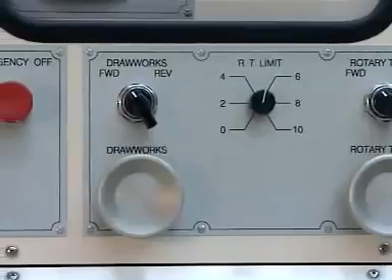As most of these problems can be simulated on ADC Well Control Training Simulator, this movie is an effort to explain the possible complications, to recognize the indications, and take the appropriate actions in a timely and efficient manner. Welcome to the ADC Simulator, where we make the effort to simulate well control situations which occur on the rig as realistically as possible. In the following few minutes, you will see an enactment of a well control operation and the complications that might arise during this operation.

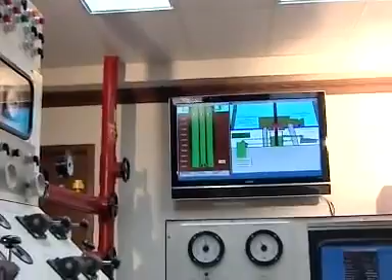Hello, boss. Hello, driller. How are you? Fine, thank you. Hope you had a good rest. Yeah, I'm excellent, in good shape.

Very good. So today we'll be drilling. Okay. And while drilling, these are the parameters you have to keep. Weight on bit will be 25 to 30,000 pounds. Okay. RPM 120. Okay. SPM will be 70. So before you start, driller, make sure all your lineup is okay. Okay. On the rig floor and also on the choke manifold. Send your assistant driller and make sure the lineup is okay. Right.

Check your alarms, and we are entering the pay zone now. Right. So you have to be very careful. Okay. Make sure you set all your alarms. Okay. And if there is any drilling break, please make a flow check. Okay. And if it's flowing, then we will use the hard shut-in method. Sure, sure. Okay.

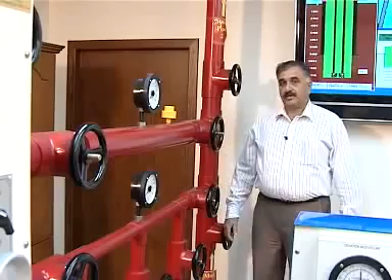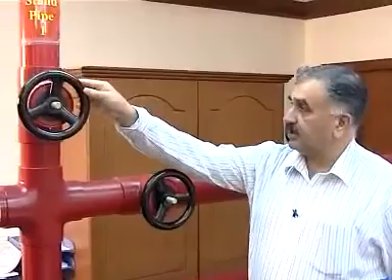I will check the standpipe manifold for correct lineup. Both mud pumps, mud pump number 2 and mud pump number 1, should be lined up. Standpipe number 1, the valve is in open position if the spindle is extended out, and if the valve is in closed position, spindle will be inside. The valve going to standpipe number 2 is in closed position.

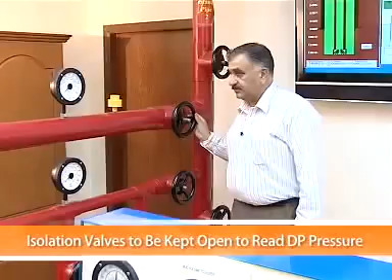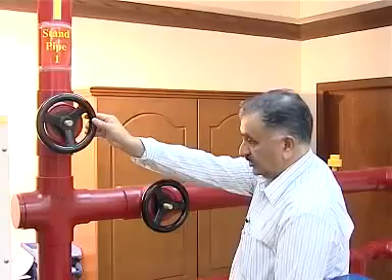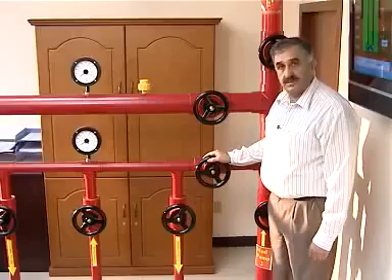This isolation valve in the middle is in open position. Both of these valves are leading to standpipe number 1, which is also in open position. The line coming out from mud pump number 1 is in open position. So both of the mud pumps, mud pump number 2 and mud pump number 1, are lined up to standpipe number 1. All valves on auxiliary lines should be in closed position. Closed, closed, closed, and closed.

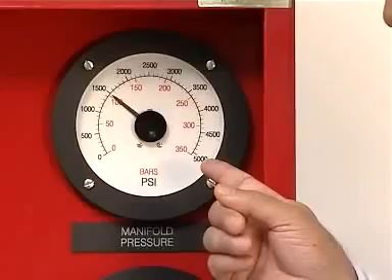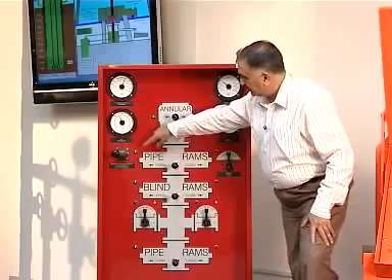Now I am checking BOP remote panel. Accumulator pressure 3000 psi, air pressure 120 psi, manifold pressure 1500 psi, annular pressure 1500 psi. Green light indicates that annular is in open position. Green light, upper pipe rams in open position. Green light, blind rams in open position. Red light, kill line in closed position.

Red light, choke line in closed position. Green light, lower pipe rams, which are master pipe rams, are in open position. So all BOPs are in open position. Both kill line and choke line are in closed position.

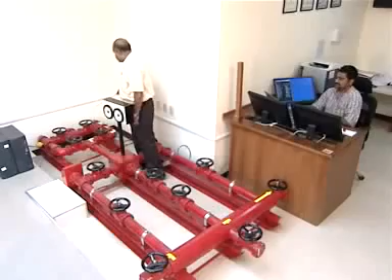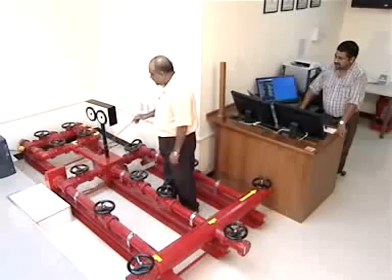As we will be using the hard shut-in method, this is the way we are going to line up the choke manifold. This is the line coming from the BOP and into the block of the choke manifold. From the block of the choke manifold, on this side we have the remote choke which will be in the closed position, and on this side we have the manual choke which is also in the closed position. The path the mud will take will be from the block through this open upstream valve, remote choke closed, valve downstream open, and out into the mud gas separator.

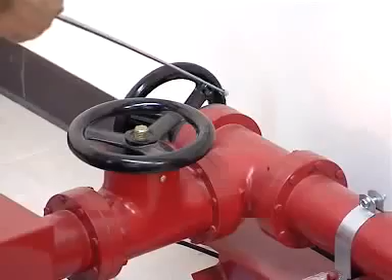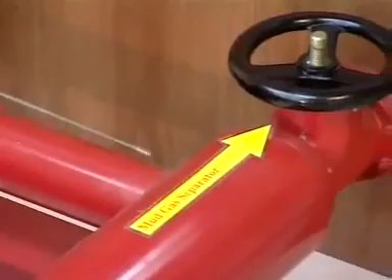From the block there is also the bypass line with two valves on this line, both of which are in closed position, which is connected to the buffer line, through which it goes to the flare line. This valve upstream of the manual choke is in closed position, the manual choke closed position, the valve downstream of the manual choke also in closed position, and this line also joins the buffer line. These are the gauges mounted on the choke manifold, one for drill pipe pressure and one for casing pressure.

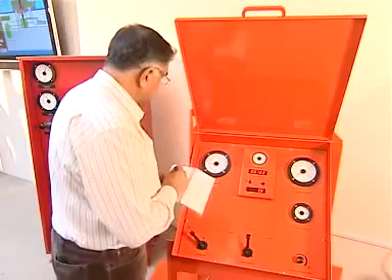To start the engines, press this button. To start the second engine, press this button. Put the mud pump 1 on, and before I go ahead to drill, I will take the slow circulation rate, bring the mud pump to 30 strokes, and I will read the pressure from remote choke panel. Slow circulation rate at 30 SPM, 650 psi.

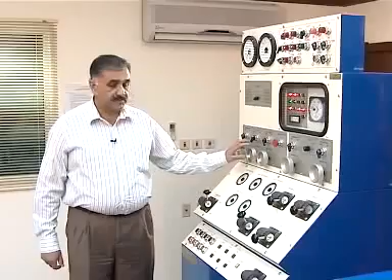I will bring the pump to 40 strokes. I will read the pressure from remote choke panel. Slow circulation rate at 40 SPM, 1150 psi. After taking the slow circulation rate, I will bring the pump speed to 70 SPM, and then I will set the alarms.

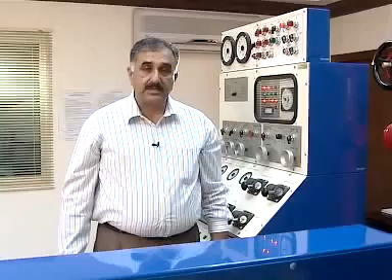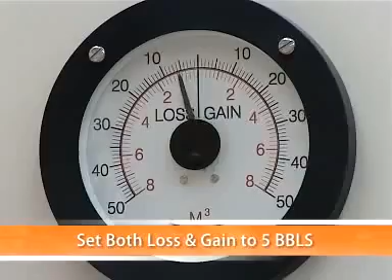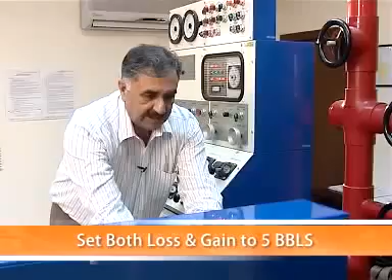Now I will set pit loss and gain alarm. I will switch on mud volume totalizers. For the active system, put the power on. Press this knob to the left and turn low adjust to the right until I see a red light. Similarly, press high set to the right and turn high adjust to the left until I see a red light.

Now I will set my flow line sensor for small increase or decrease in flow. So press this one to the left side and then rotate the low adjust until I hear an alarm. Then press to the right side and rotate high adjust until I hear an alarm. So now you leave it on, make sure the alarm is in on position.

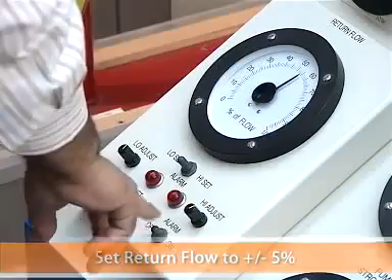I will lower the bit to bottom, and once the kelly drive bushings are sitting inside rotary table, then I will start the rotary. Okay, I'll continue to lower down until I tag bottom.

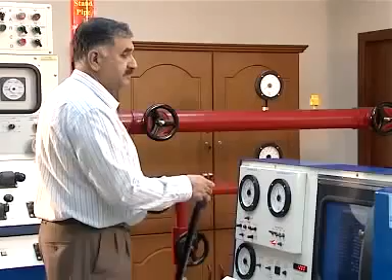I got a drilling break, stop the rotary, disengage the rotary clutch, and now I am picking up.

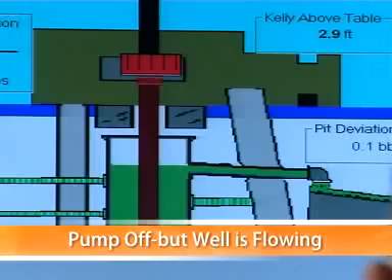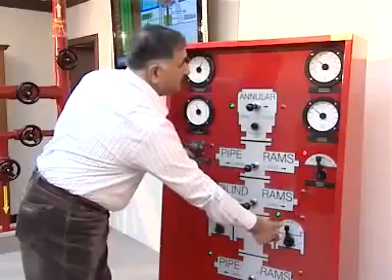Now I will shut the well in. And open the choke. Well is shut in. Tool pusher, come on rig floor. I have a kick.

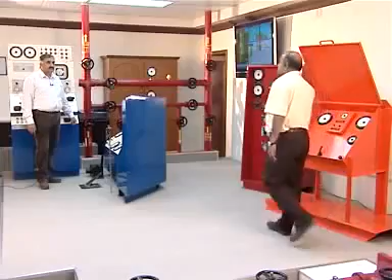Yes, driller, what happened? Well, I made a flow check on drilling break, and the well was flowing. So I shut it in with the upper pipe rams, and I've got shut-in drill pipe pressure 810 and shut-in casing pressure 900. And what is the gain? 4 barrels. Okay, what is the MAASP?

1600 psi. That's a very small kick. I think we can manage to kill it very easily. I will go round, make a quick check and come back. In the meantime, you keep monitoring the pressures to check for migration. Make sure that the pressure does not exceed the MAASP. Anyway, if it is going more than 200 psi than what it is now, please call me. Okay.

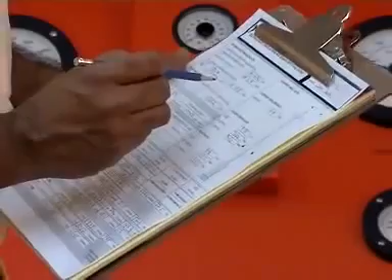Okay, the kill sheet is now ready. The MAASP is going to be 1690 psi. We will be pumping at 30 SPM, and the strokes to displace the string volume is 2326. The open hole volume is 1719 strokes. The total annulus volume or the bottoms up is 6513 strokes, and the total volume to kill the well is 8838 strokes.

The kill mud we will use is 13.2 ppg, and we have the pressure schedule here, the pressure drop for every 100 strokes of kill mud pumped, and these are the graphs for this schedule.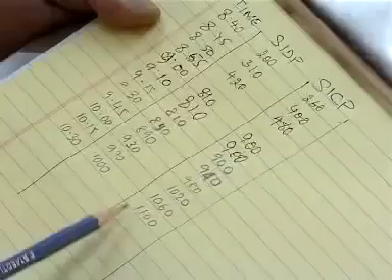The stabilized pressure at 9 o'clock was 810 psi on the drill pipe and 900 psi on the casing. It stayed like that till 9:15, and after that we are seeing some gas migration, and the pressure at this time at 10:30 is 1000 psi on the drill pipe and 1100 on the casing. That means there has been an increase of about 200 psi.

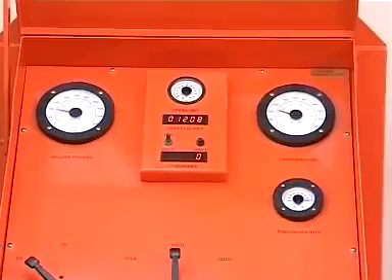As we have had an increase of 200 psi due to gas migration, the first thing that we will do now is to bleed off this excess 200 psi to restore the bottom hole pressure to its original value. To reduce the drill pipe pressure by 200, we have to be looking at the casing pressure gauge, because there is a time delay of 1 second for every 1000 feet of the well depth.

So now I am going to reduce the pressure on the casing side by about 100 psi, and then we will see a corresponding drop on the drill pipe gauge after a few seconds. The drill pipe pressure is now 850 psi. That is about 40 psi more than when we initially shut in the well. So we can now start killing the well.

Driller, the kill mud is ready, so have the derrick man line up the kill mud. We will be killing this well with 30 SPM using the wait and weight method. So I want you to increase the pump in stages, 5, 10, 15, all the way to 30 as I give you the signal.

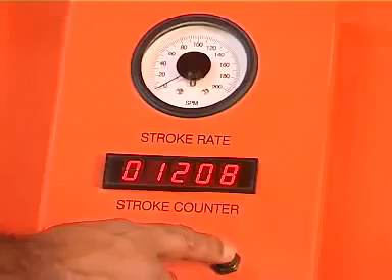First of all, we will reset the stroke counter. Okay, driller, give me 5 strokes please. We will bring up the pump to the kill speed in stages, holding the casing pressure constant by opening the choke as necessary.

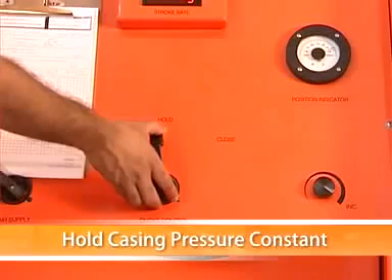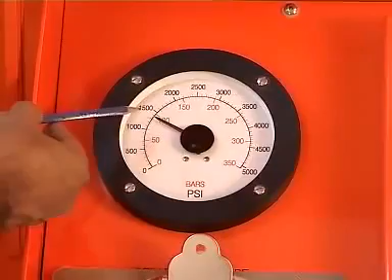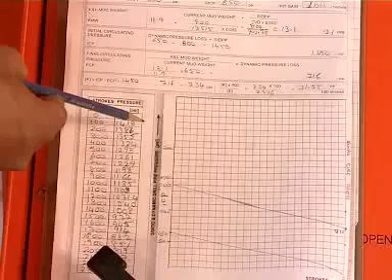Now that we have the pump rate up to kill rate speed, we will now follow the schedule as we have calculated in the kill sheet. We have now pumped 213 strokes. We have a pressure of about 1400 psi, and we need to keep, as per the schedule, 1380 psi, which means we are 20 psi overbalance, which means everything is going well.

We have now pumped 904 strokes. The pressure is about 1200 psi. As per our graph, we should have 1160 psi. So we have now 40 psi overbalance, which means still everything is okay.

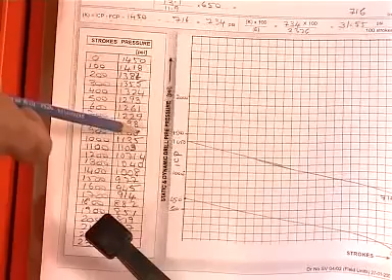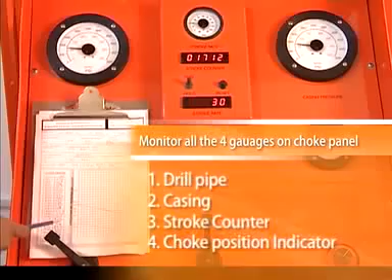We have pumped now about 1700 strokes. On the drill pipe side, we have about 950 psi. As per our schedule, we should be having 915. So we are still overbalanced by about 35 psi, which means everything is still okay.

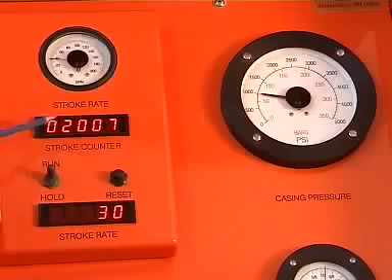The casing pressure has been rising steadily as the gas expands as it comes up the hole. Since we have already pumped 2000 strokes, we do not worry about the MAASP anymore, because the influx is already inside the casing.

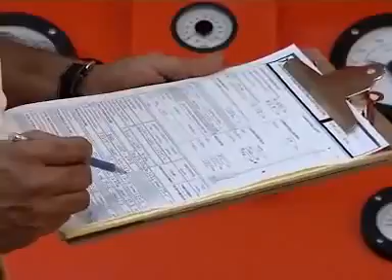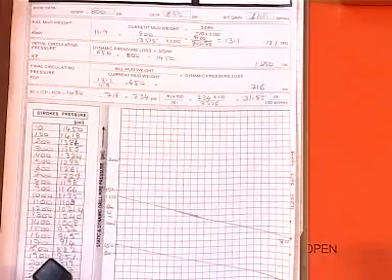We have now pumped 2367 strokes, which means we have displaced the drill string with the kill mud. We are now at the final circulating pressure, which according to our calculation should be 716, and the gauge is showing 750, which means we are 35 psi overbalance and everything is okay.

We have now shut down the pump after pumping the string volume to check for pressures. The pressure on the drill pipe side is 0. That means the well is dead from the string side.

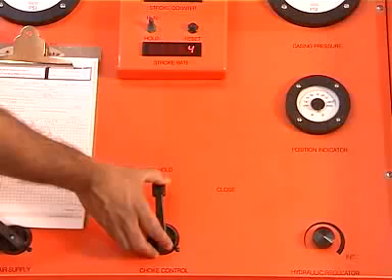Okay, driller, give me 5 strokes please. We will bring up the pump to the kill speed in stages, holding the casing pressure constant by opening the choke as necessary.

Oh, the pressure seems to be going up on the casing side. The casing pressure has climbed up from 1100 to about 1400. That's 300 psi more than normal. The drill pipe pressure also has climbed up by about 300 psi. Okay, driller, put the pump off. Totally off.

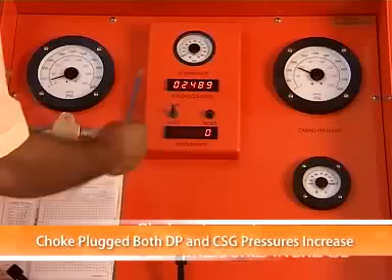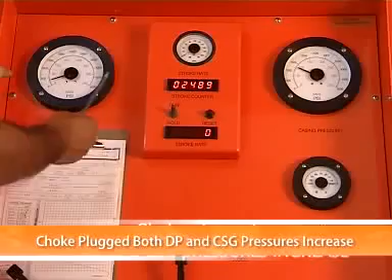We noticed that first the casing pressure started to go up, and after some time the drill pipe pressure also started to go up. Looks like we are having a plugged choke. So I asked the driller to shut down the pump immediately, and I closed the choke as well.

Now the drill pipe pressure should have been 0 because we have already pumped the kill mud down the drill string, but it is showing about 300 psi, which means this is some trapped pressure. So the next step would be to bleed off this trapped pressure and repair the choke or change the choke.

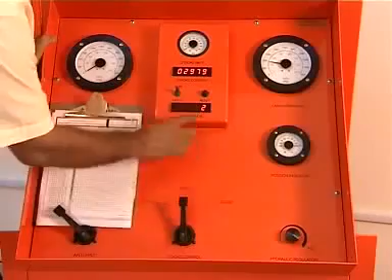We have just repaired the remote choke, and we are going to start the kill operation again. We will again come back to kill rate speed by holding the casing pressure constant. Driller, 5 strokes please. Ten please. Okay, we are back to the killing operation. Drill pipe pressure is now at 750. Casing pressure still at 1100. Everything seems to be okay.

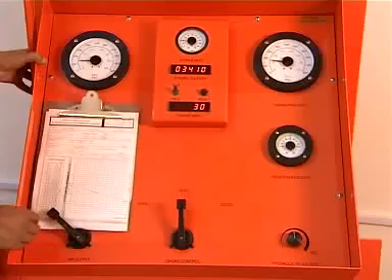Okay, I am seeing both the pressures coming down now. So I am closing the choke. In spite of my closing the choke, there is no reaction. Seems like there is a choke washout. Okay, driller, put off the pump. Since the choke is washed out, I have to close the HCR.

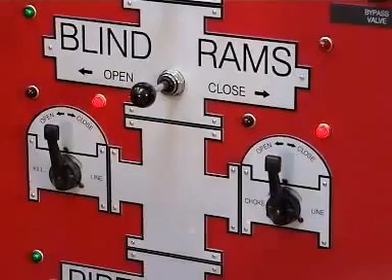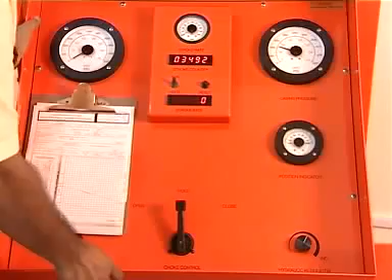Okay, we have repaired the remote choke now, and we're going to start the kill operation again. We will bring up this pump to speed holding the casing pressure constant. Driller, give me 5 strokes please. 15. We are back to kill pump rate, and the drill pipe pressure is showing 750 psi. Pressure is 750. Seems okay.

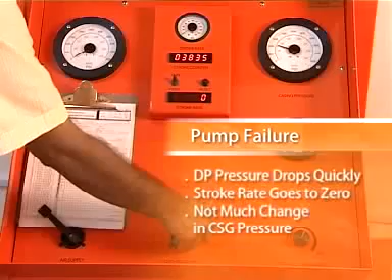Seems like the pump is down. Driller, the pump is off. Call the electrician and let's get it fixed again. Driller, since pump number 1 cannot be started, let's start with pump number 2.

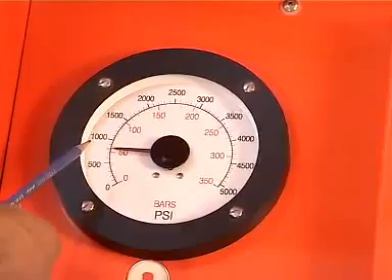We have lined up standpipe number 2 with pump number 2, and we are going to start the kill operation again. We will bring the pump up to speed holding casing pressure constant. Driller, give me 5 please. 15. 30. We have now pumped 3,900 strokes. We are still holding the FCP about 800. Casing pressure is showing about 1000 psi.

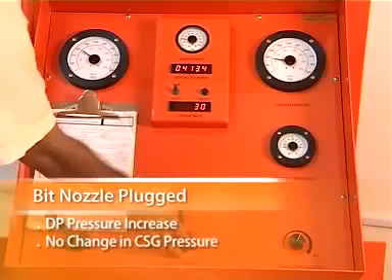The drill pipe pressure has shot up suddenly. There is no change in the casing pressure. Seems like the bit nozzle is plugged. Driller, let's shut down the operation. Reduce by 5 strokes. Shutting down the well, keeping casing pressure constant. Okay, put the pump off completely.

Driller, looks like the bit nozzle was plugged. The drill pipe pressure went up, but there was no change in the casing pressure. So there's not much we can do now. Let's bring the pump back up to speed, holding casing pressure constant, and whatever we see on the drill pipe will be our final circulating pressure now.

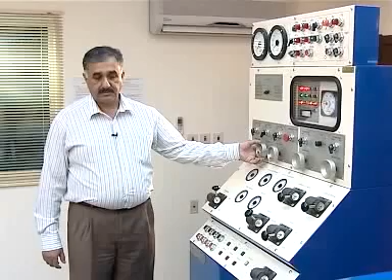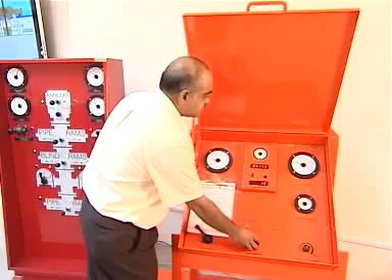Driller, give me 5 please. Give me 10. Give me 15. Give me 20. Give me 30. We are circulating at 1500 psi because of the plugged nozzle. The gas is also coming to surface. We can hear the sound of the gas.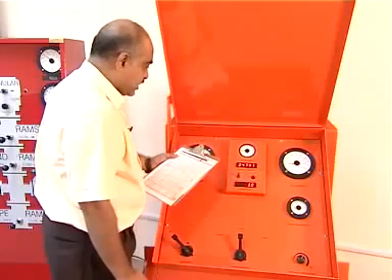The calculated bottoms up strokes was 4794 and we are now almost there with 4756. We can still hear the gas coming out, and as the gas comes out we can see the casing pressure has gone down. Drill pipe pressure is still at 1500 psi, so everything seems to be okay. The drill pipe pressure is still at 1500 psi and all the gas seems to be out. There is no more sound of gas coming.

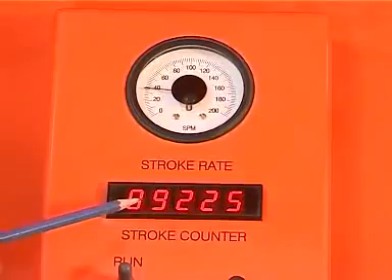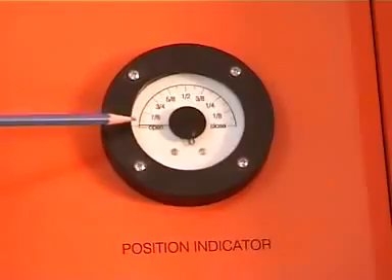We have pumped 9225 strokes. Casing pressure is almost zero. The choke is fully open. Drill pipe pressure is still 1500 psi. It is now time to shut down and check if there are any pressures left in the well. Driller, we will start to shut down the killing operation now. So please reduce the pump strokes 5 by 5.

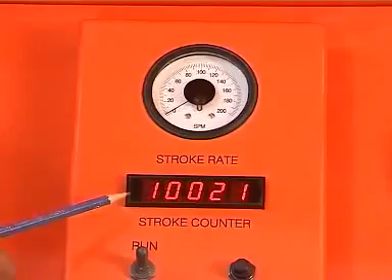Okay. Okay. Okay. Okay. Put the pump off, please. We have pumped about 10,000 strokes now. Drill pipe pressure is showing 0. Casing pressure is also showing 0. It looks like the well is dead.

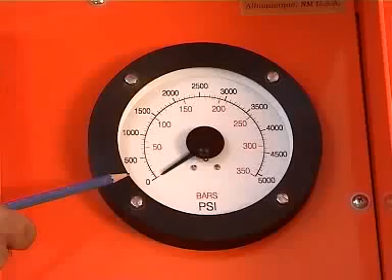We will now flow check through the choke manifold. The choke is now wide open and there is no more flow from the well. The well is dead. We will now open the BOPs and go back to drilling. Driller, great job. With all these complications, we managed to kill the well safely. Thank you very much.

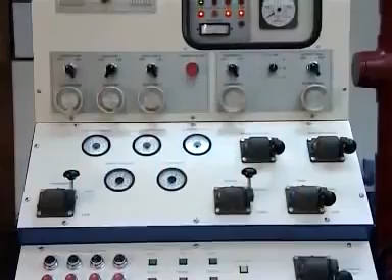I thank you for taking the time to watch this video, and I hope that your understanding of well killing operation will become a bit clearer.